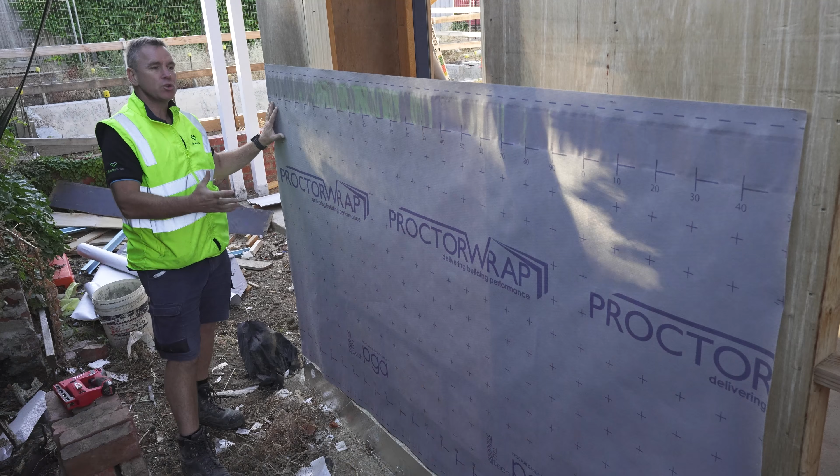Today, we're showing you the conventional way of wrapping a house externally using the ProctorWrap as our air barrier against a more cost-effective, better method which helps with time, money, and will actually give you longevity in the product.

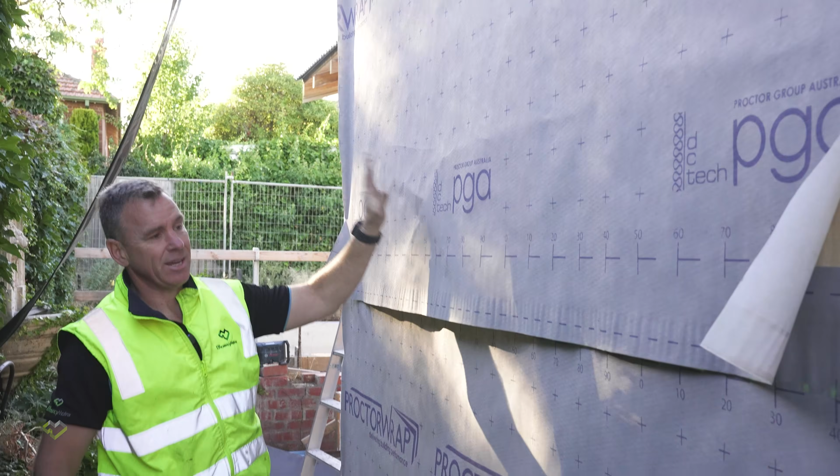Okay, now we've actually wrapped the top section, making sure that we're using the integrated tape. This will enable us to rip off these cellophane protections on the glue-loaded barrier to actually use the integrated glue as we go. Pulling this out and applying. So in this section here, I've got a substrate. It's a fairly easy process.

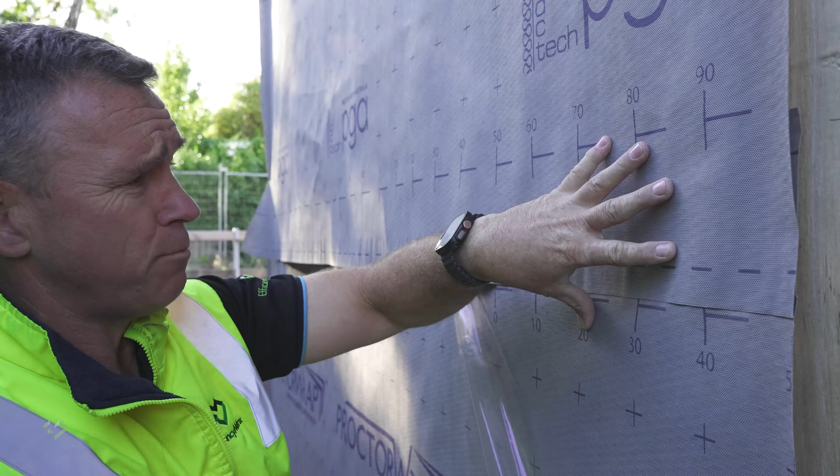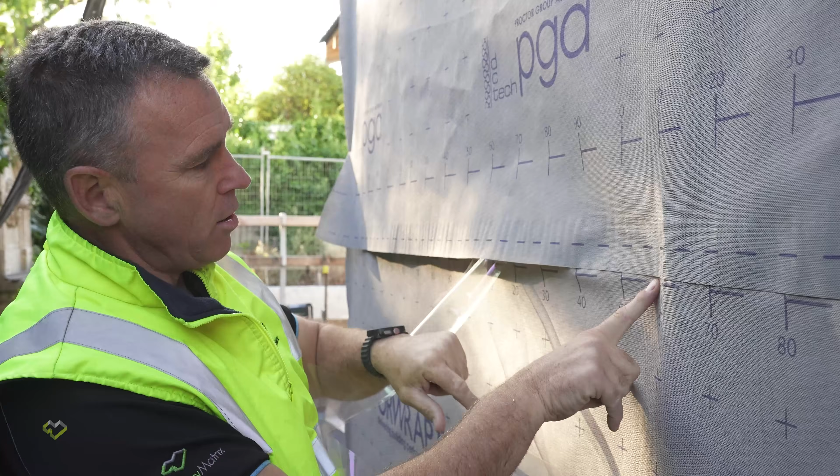But I come to a window and now I'm actually going to have a section that I don't have backing. So already I'm starting to shadow and I'm creating issues. Once again, I'm shadowing. And I've actually got areas where it's not bonding and I could rub it, but I'm not going to be able to pick that back up. That happens in between stud work as well.

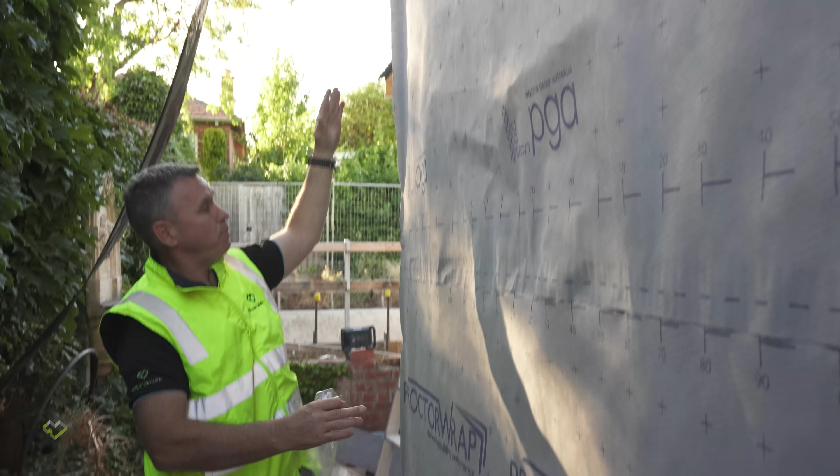I've got a couple of issues doing it this way. You need to make sure that it's completely lined up when you're applying it. And you can actually have a look, trying to wrap the bottom section and the top section without wind is complex in itself. But with wind, it's such a task that it causes the process to step out and you're going to end up with multiple issues.

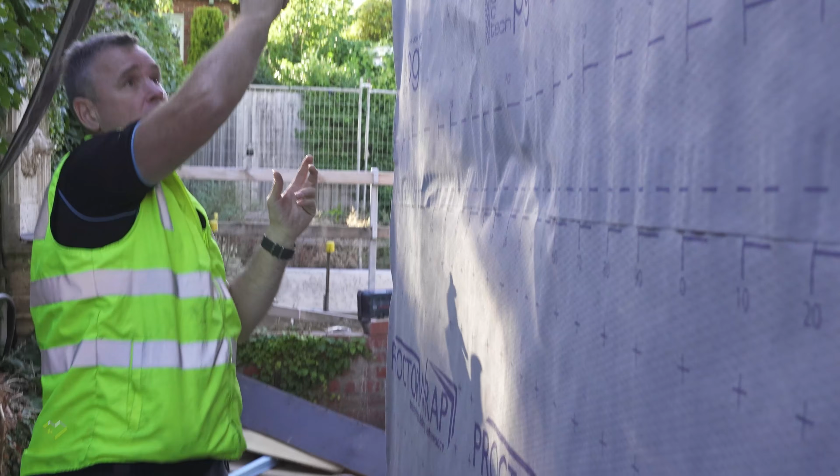I'll show you another technique very shortly where we actually will measure from length, height, make one piece up, which will enable us to fix at the top, rolling it out all the way till we get to the end, and we've pre-taped on both sides and use the integrated tape on a flat surface where we've got good backing and good adhesion. So if you have a look here, we're already starting to step out.

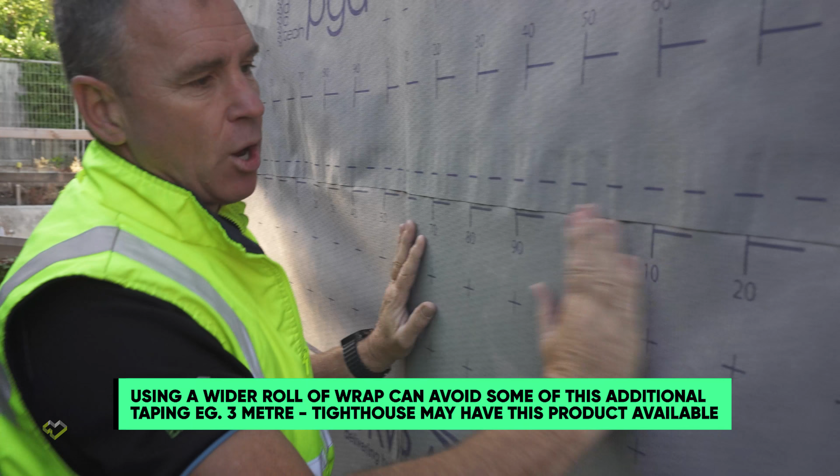Here we've got bracing behind it, so it's always going to be perfect. But if we make our way to the studs as well, and we try to make that glue bond and stick, it causes you issues. One person to do this whole wall will be a process.

Back in our factory, we were able to measure height, length, width. We've cut 3 pieces and bonded them together. This will allow us to pin the top of the air barrier and roll it out as we go, allowing gravity to help with the install process.

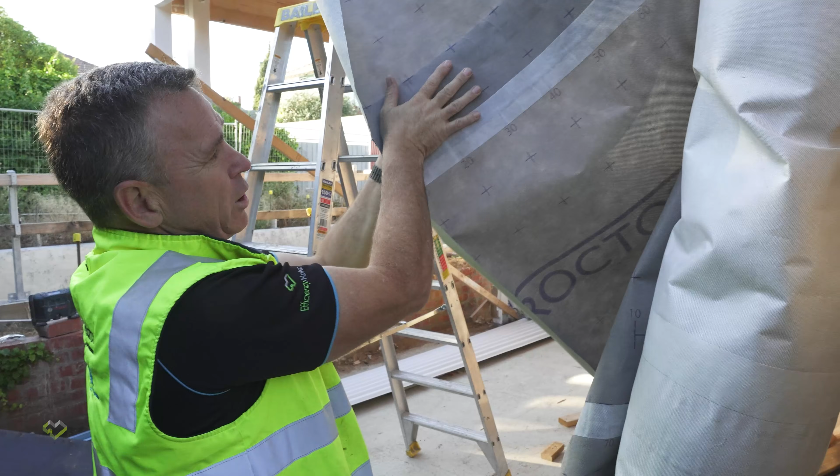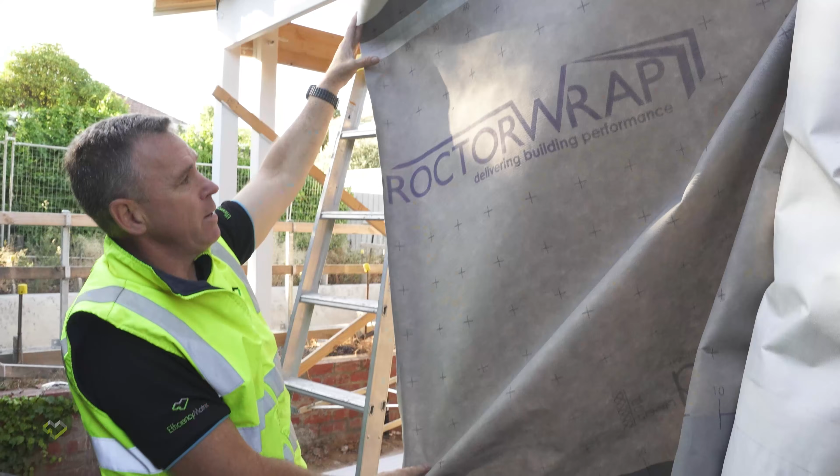And if you have a look, we've taped the back, we've taped the front, and we've used the integrated tape, and we've applied it on the ground where the surface is completely bonded. The longevity of this installation will not fail. If it hasn't been done properly, you're never going to be able to fix it again. So we'll actually show you in the next step how easy it is now to wrap this house.

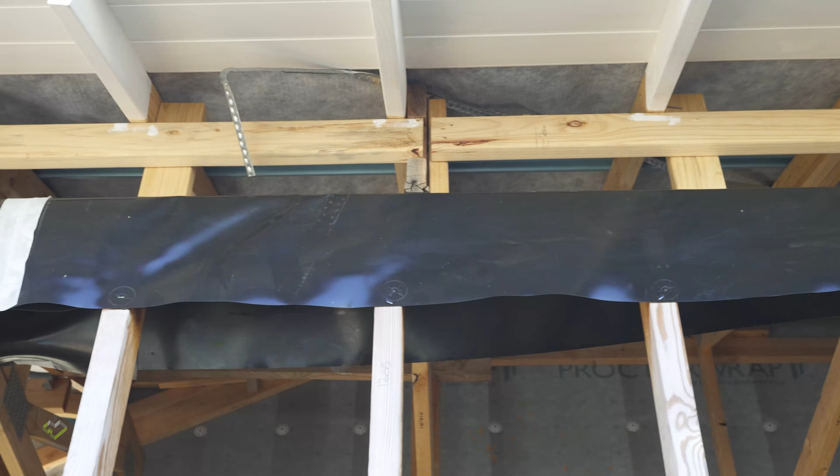At tightHOUSE, we've come up with performance solutions for using an air barrier on the outside of a house, and we've come up with this product called tightBRIDGE. We installed this on top of the stud walls prior to the trusses being installed, which will enable us to continue the air barrier inside above the roofline.

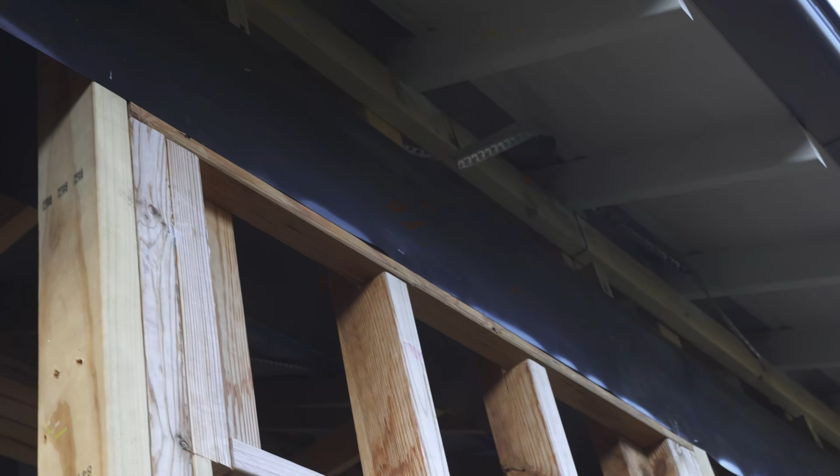This tightBRIDGE is the section that we will be taping our external air barrier to, and I've got a help down below, and we're going to show you the process of having 3 pieces of the air barrier previously taped.

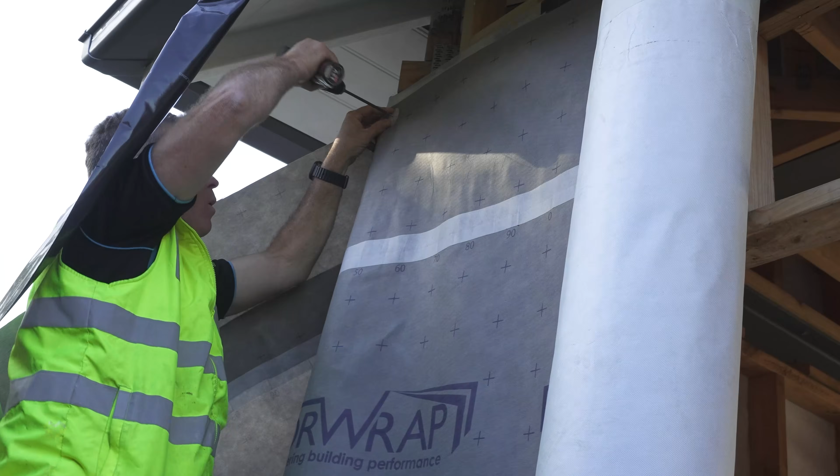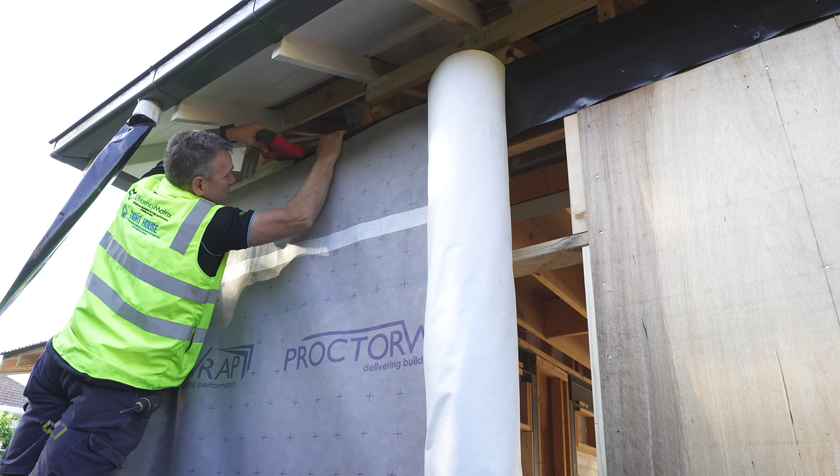I've used the batten at the top as my starting point, and I'm keeping it level on this tightBRIDGE, and I'll merely just staple. I'm letting gravity work through. I'm not needing, with wind, to fight against the elements to actually get good adhesion across all of my joints. And I'll merely just follow George all the way down and fix the top.

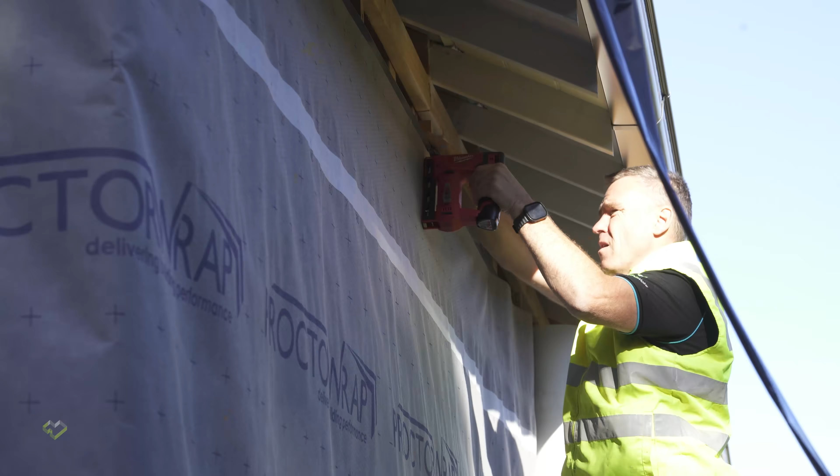Okay, so very quickly, I've been able to roll this out with the help of someone else. I don't need to try and go against the elements because you can just start to see now I'm starting to get a little bit of wind in behind it.

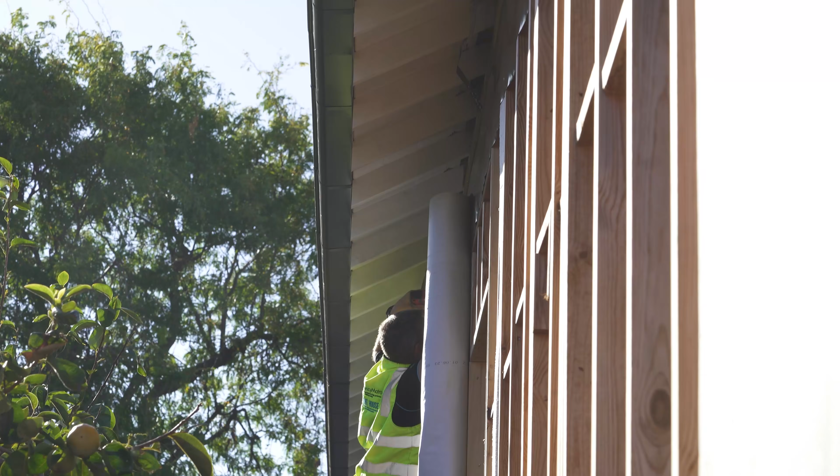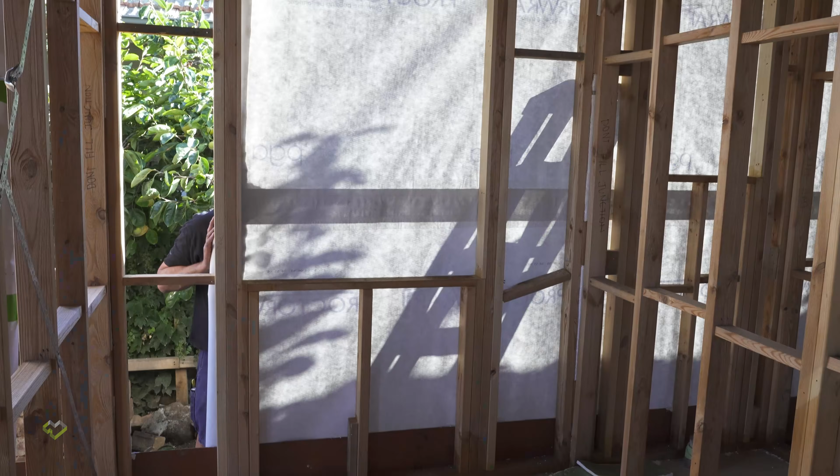Imagine trying to align the integrated tape in midair, and not only that, doing one or two joins. This way, it's 100% installed properly, and all we literally need to do is keep rolling it out and allowing gravity to help with this install. This is a far better method. Time is money, and not just that, you're going to ensure that when you've applied the tape, the integrated tape, it is 100% uniform, and you've got a perfect seal on this air barrier.

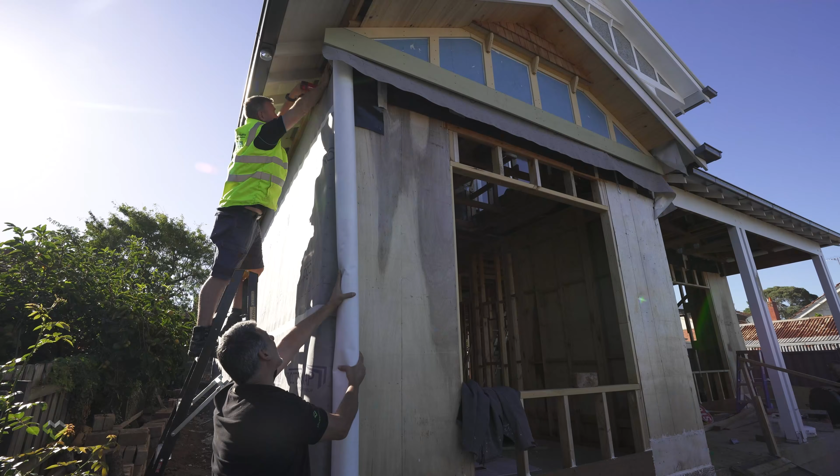Okay, in under half an hour, we've been able to cover this whole side. We've actually returned it around the front, then stepped back in and got to the doorway. And this was all accomplished with two guys installed in under half an hour. Now we've got gravity to work with. We're going to start at the top and work our way down, pinning this all the way down.

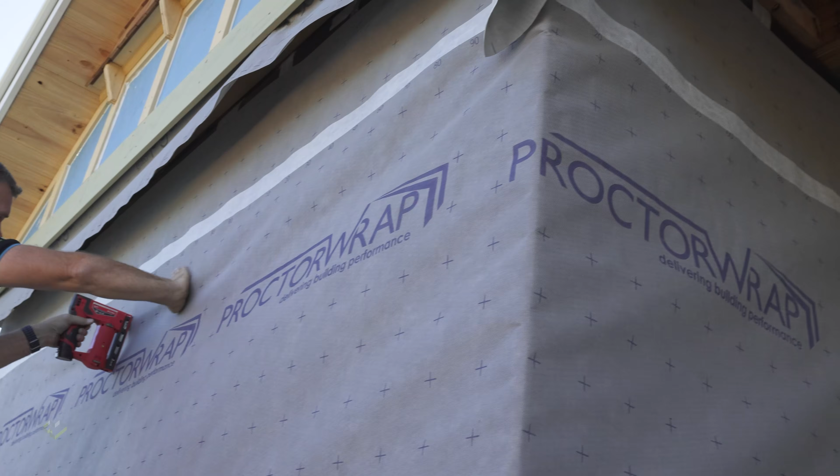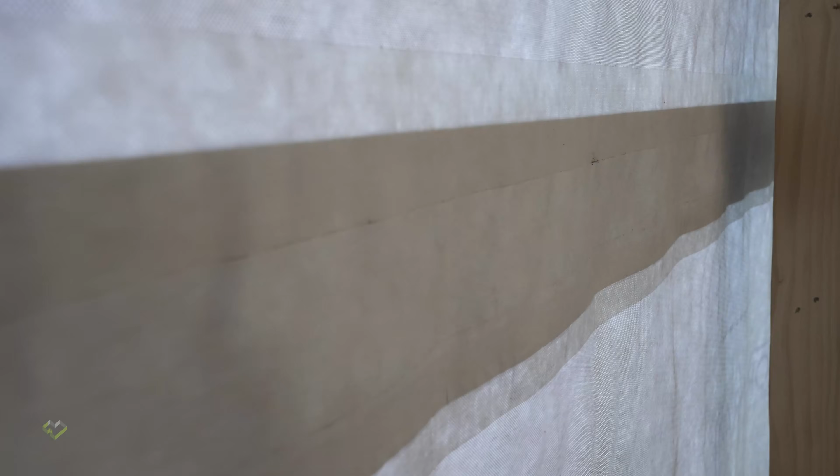We're actually going to fix this with staples, and where every noggin is, we'll be able to install buttons, purely because they're going to batten this wall, and this is going to have a Hebel finish, so we don't want to impact any of the surfaces that the carpenter needs to install to. But time, money, effort is the way to install this product. Pre-make it, guys, and install it in one hit.

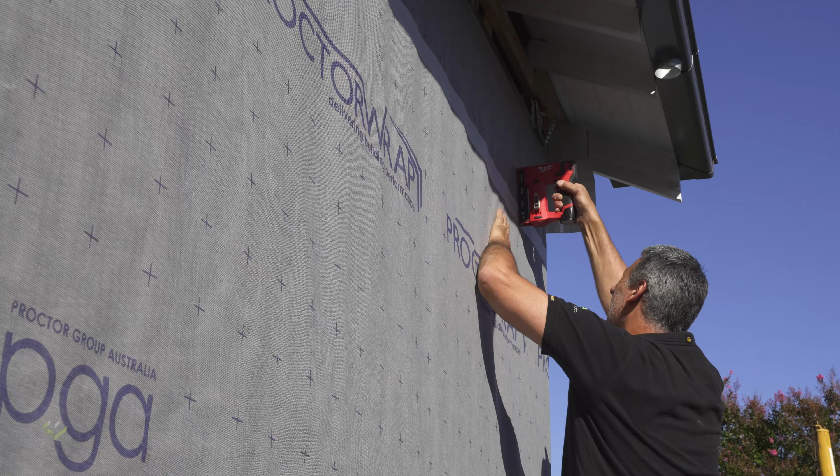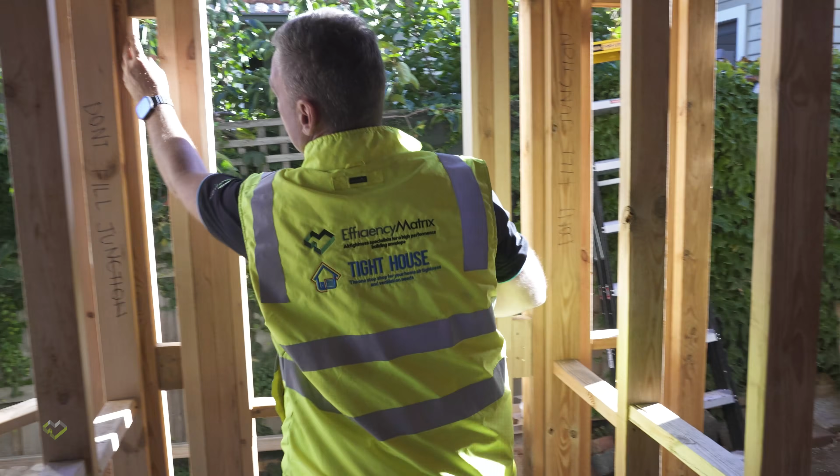I'd just like to talk about an internal wall that comes off an external. Now, when we insulate the external wall, the insulators have got all these areas in between the studs to be able to fill in. But when it comes to an internal wall, the way that the frame is done, these sections behind internal wall junctions to the external walls always get missed. So we'd like to show you a technique of what we've actually done prior to the wall air barrier cladding on the outside, how we've actually insulated that.

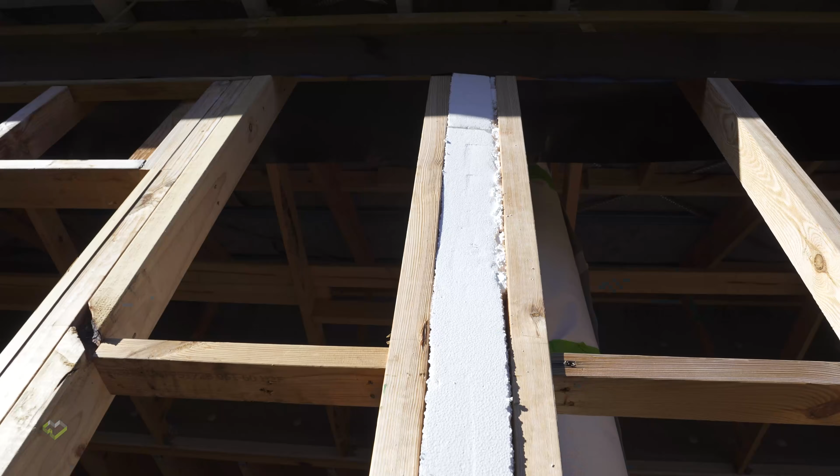This is the outside section that always gets missed, and what we've actually done is filled this up with some foam. So we've got a good insulated area, because these areas will always be insulated from the inside, but an internal wall comes off this section, and around the whole perimeter of the house, we've made sure that these areas have been insulated prior to us doing the air barrier on the outside and the weatherboards.

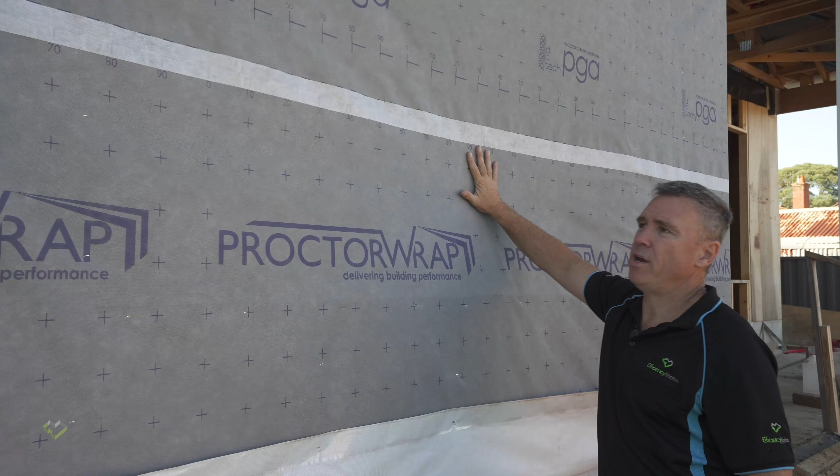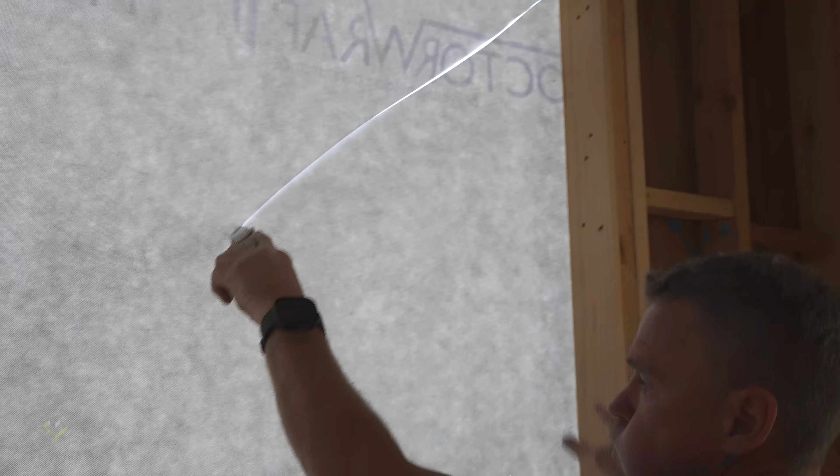Okay, now we've got a window here. We haven't cut it out yet, but we're going to show you an economy version of Proctor's window detail, where we use a dry flash, we use U-Butte, which is a butyl tape. The reason why we're going to go with the economy solution here is because this is a direct cladded, no veneer building, and once the windows are installed, the plumber or builder will install a flashing over the top of that window. So that's our weatherproof seal. So we're really just concentrating on an airtight building solution. We'll start that process and go inside, and we'll cut this out.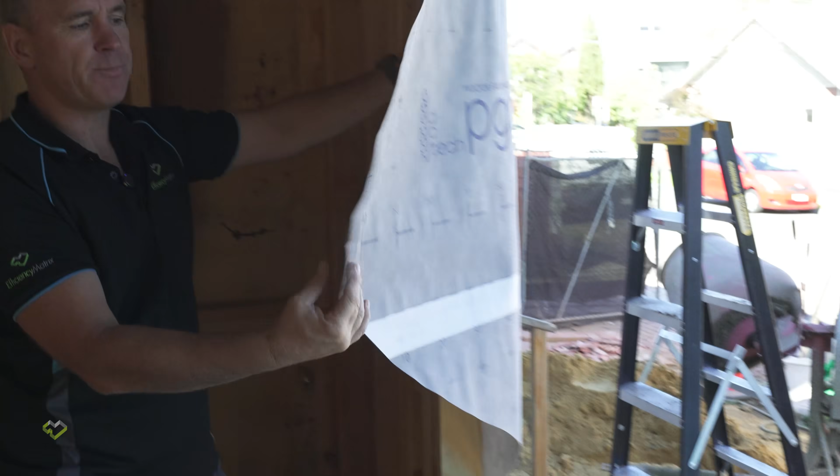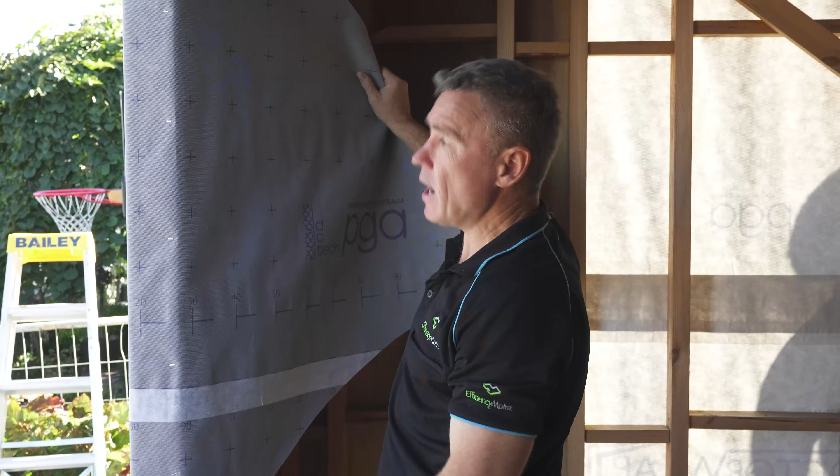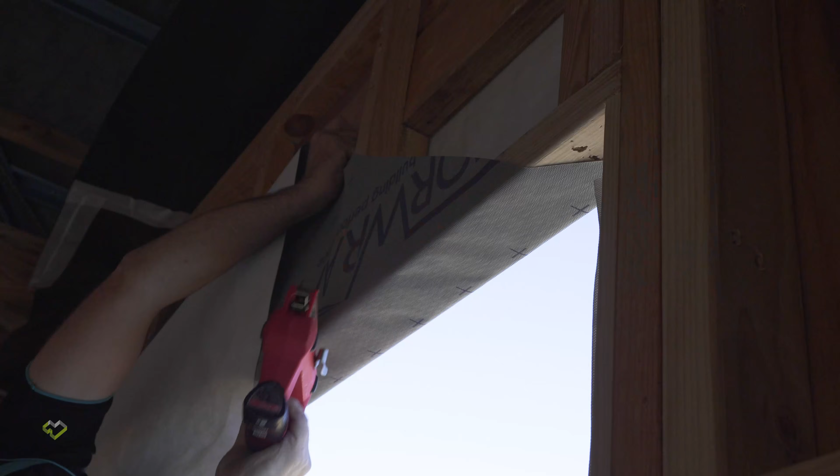Okay, now we've cut this window corner to corner, and that will allow us the next process, and we'll pull the bottom and the sides, and we'll end up fixing them, which is the first step. Now I've stapled the sides and the bottom, and all I need to do is just trim off the excess. Now previously, in Proctor's window detail, we would leave this step to the last. But with the economy way that we're going to finish this window detail, we can go ahead and fix that detail straight away and trim off the top as well.

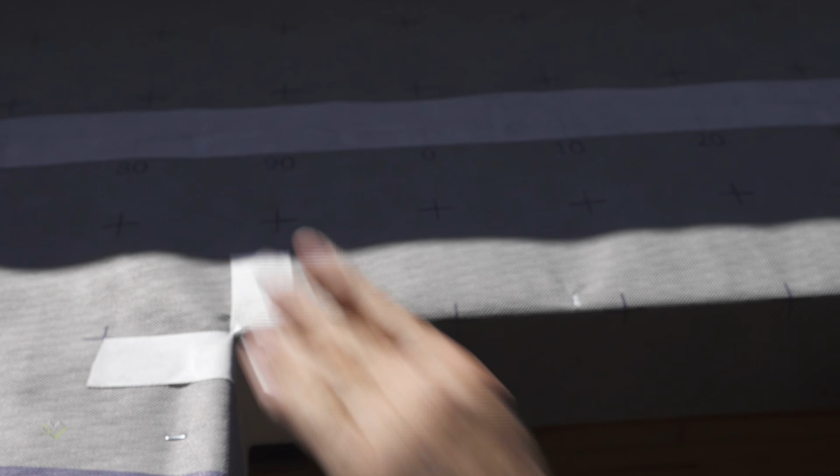Okay, now we've completed all the steps. We've cut to the center, we've pulled the flaps in, and we've fixed it on all sides. Next step, we've got a gap here in the wrap. So I'm going to use a Proctor High-Tack Plus, and I'm just going to actually seal the wrap at the top to make sure that it's completely sealed. And I'm just making sure that I'm getting a good seal. Okay, now that completes the sealing process at the top, and I'll continue that on the other side.

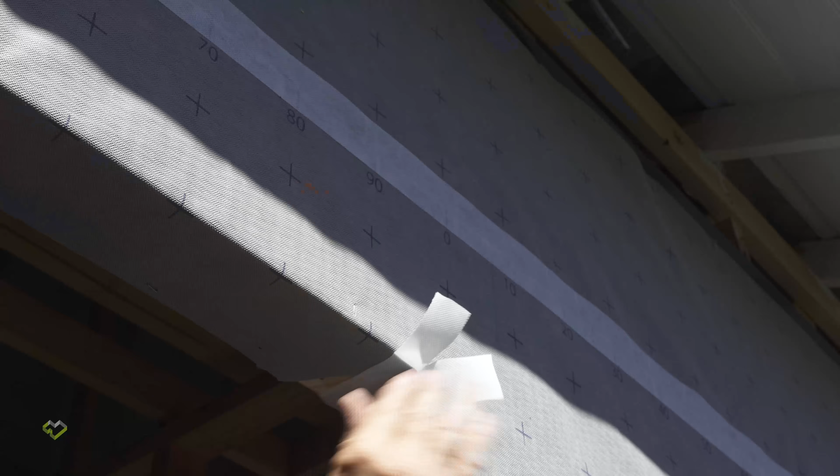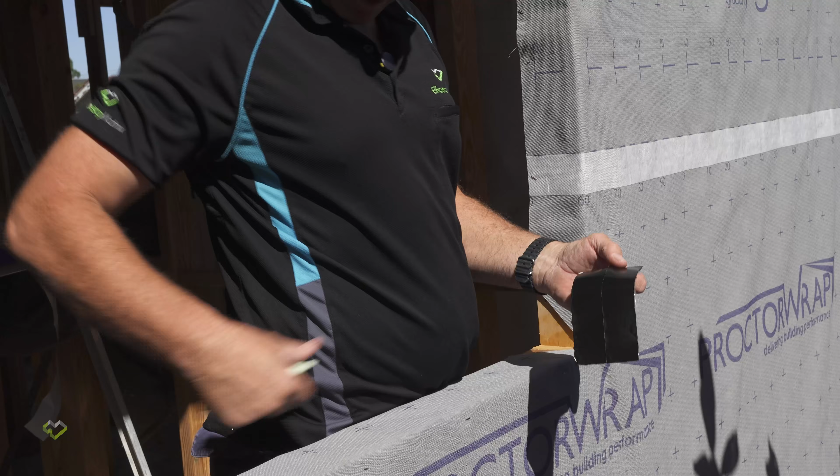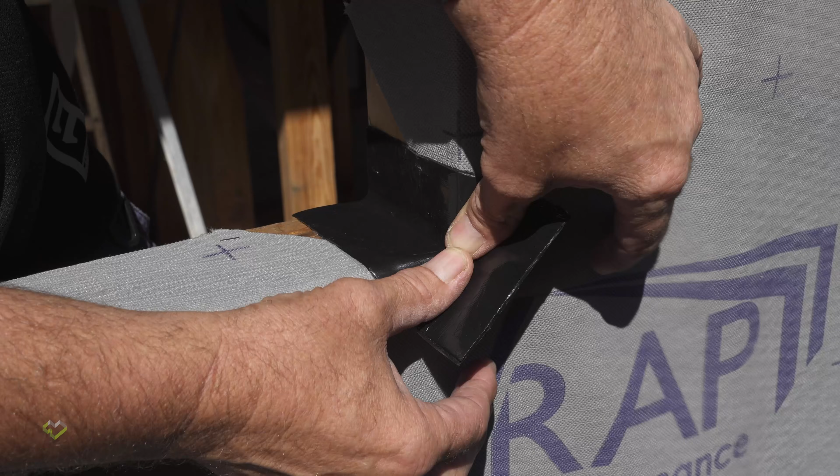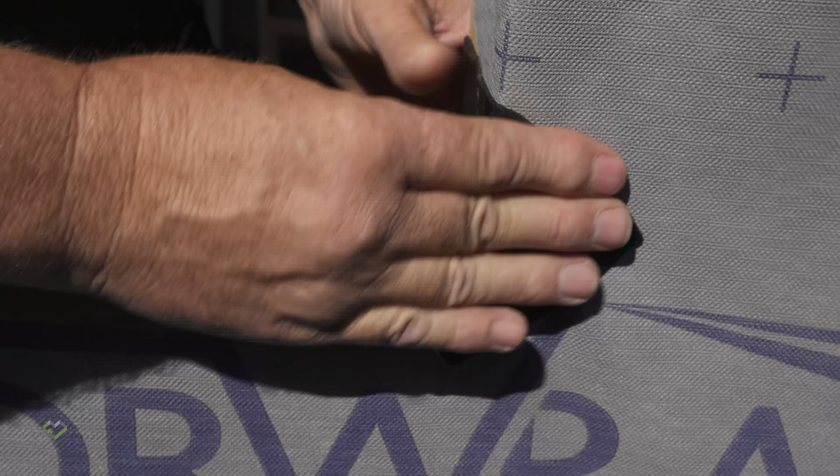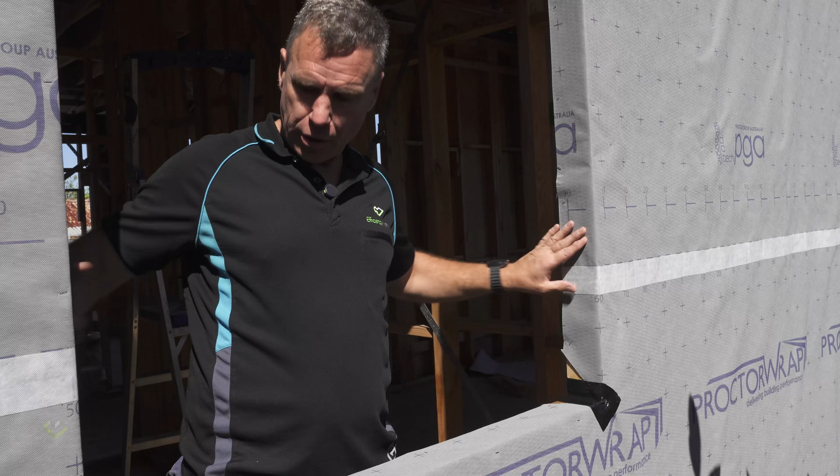This detail is completely different to the Proctor passive window detail, but due to the way that the windows are being installed, this is quite adequate for how we need to seal up these windows. I'm going to start off installing this dry flash up 250 mil. I've previously marked it, just trying to keep it square and flush to the back of the stud.

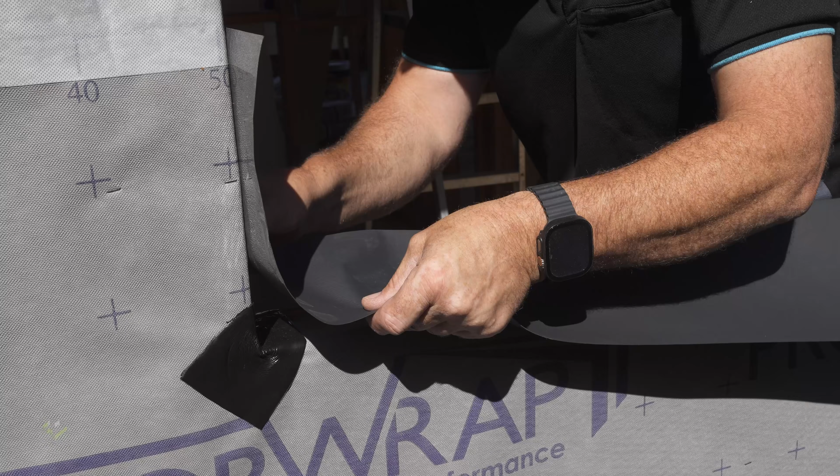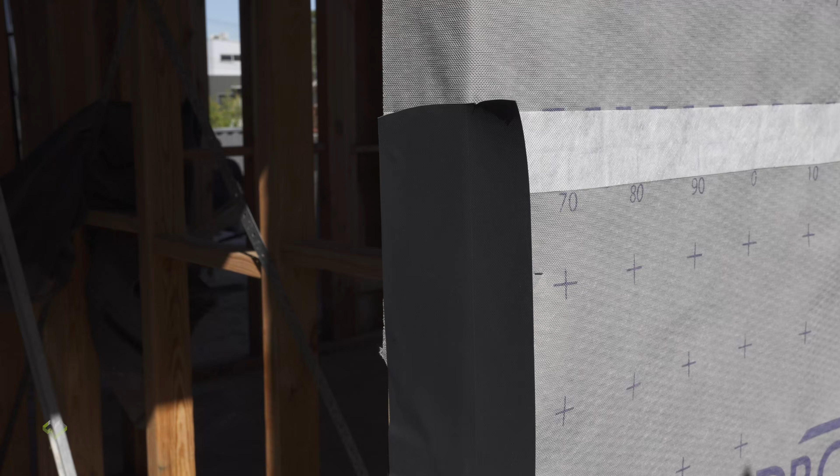And when I get to the corner, I want to make sure that I'm not missing it and I'm at a true 90 degrees. Applying with a bit of pressure as I work it around. Making sure I'm nice and tight in the corner, and just work that glue and make sure you get a good bond to your air barrier. And usually I would use an applicator to make sure that I'm helping with that bond process.

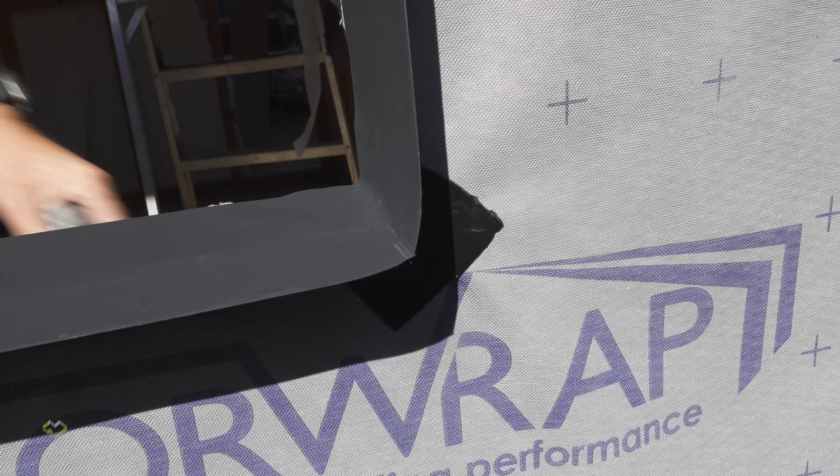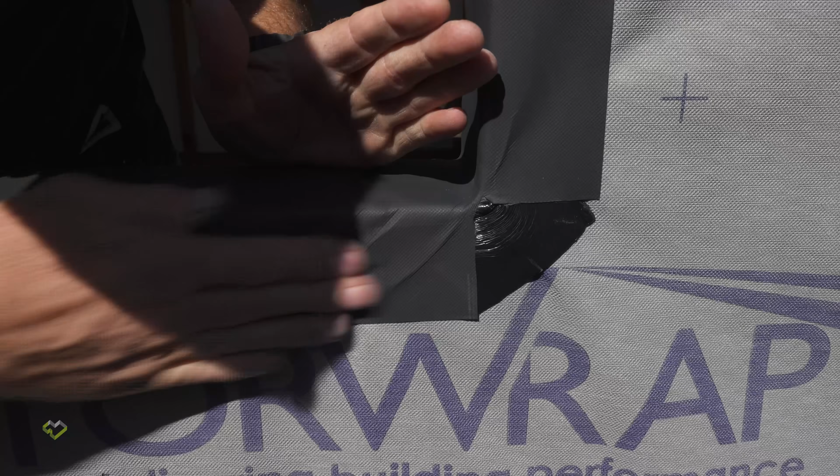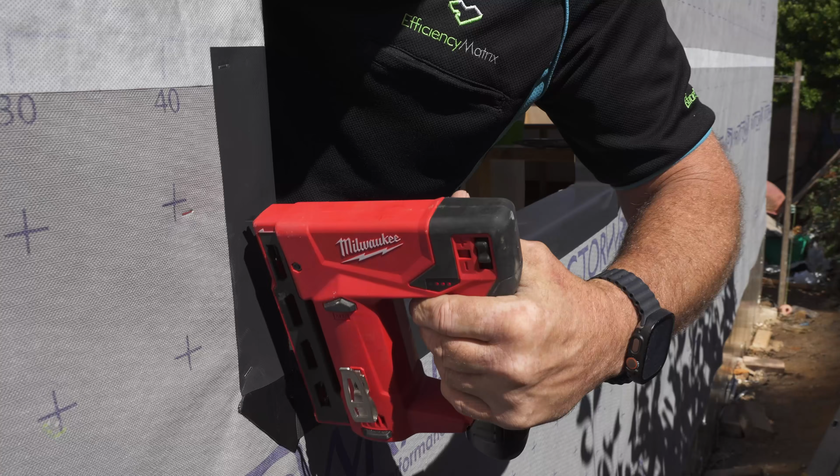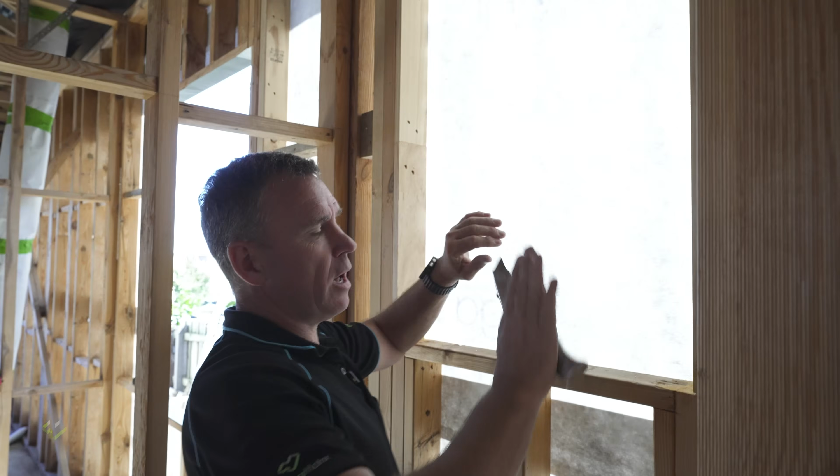Okay, so now here's another window. I've got doors. I've got more windows further down. I'm just going to go and cut all the windows, pull them all in, and doors, and staple all sides for the next process.

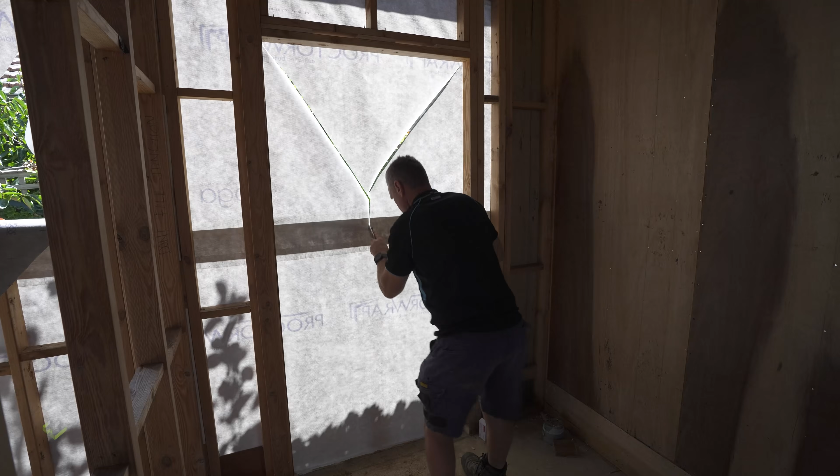Okay guys, just a quick note. As we said previously, multiple times, we've used the integrated tape. We've taped the outside and we've taped the inside or the back of the air barrier. We've installed it. Now, it might be some time before the builder actually gets to close this in.

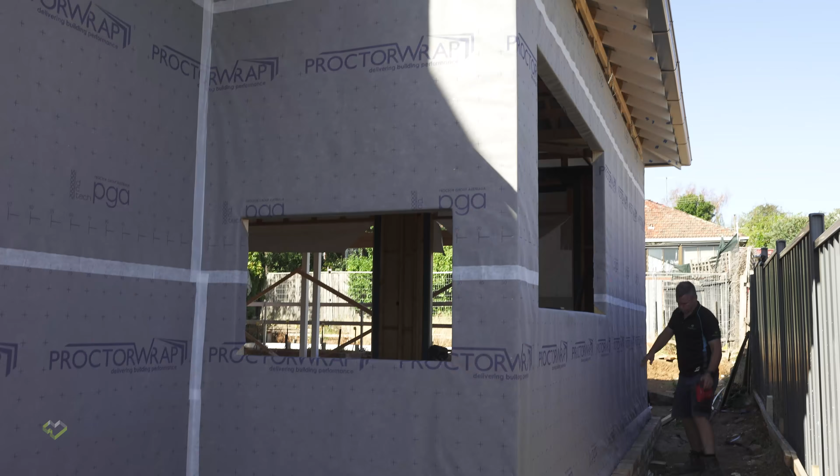By taping it on both sides, we are making sure, depending on which direction the wind is, it's going to ensure that it's sealed, it's not going to give way, and we're going to have longevity on those joins many, many years after the outside and the inside's cladded, and we could guarantee that this is not going to fail with this system.

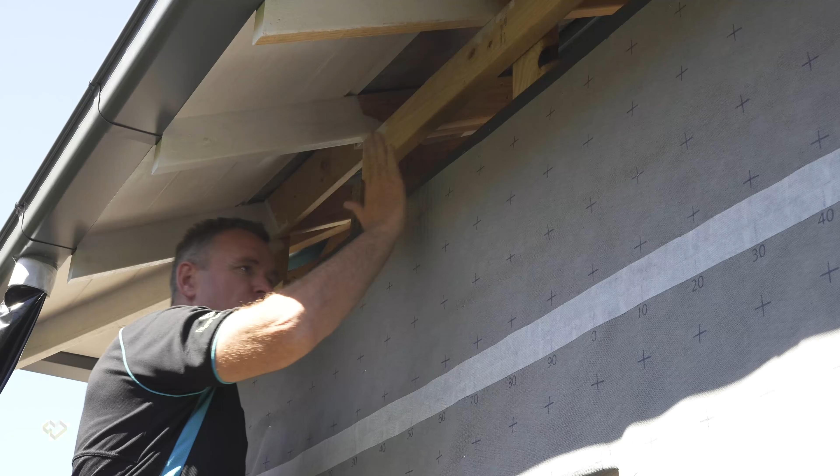Okay, now we've wrapped the outside. We've got our tightBRIDGE at the top. Now what we need to do is we need to connect our air barrier to our tightBRIDGE. So once again, we're going to use a Hi-Tac Plus tape, 75 mil, because we want a good purchase. And we are merely going to tape the Hi-Tac Plus to the Proctor CW and the tightBRIDGE.

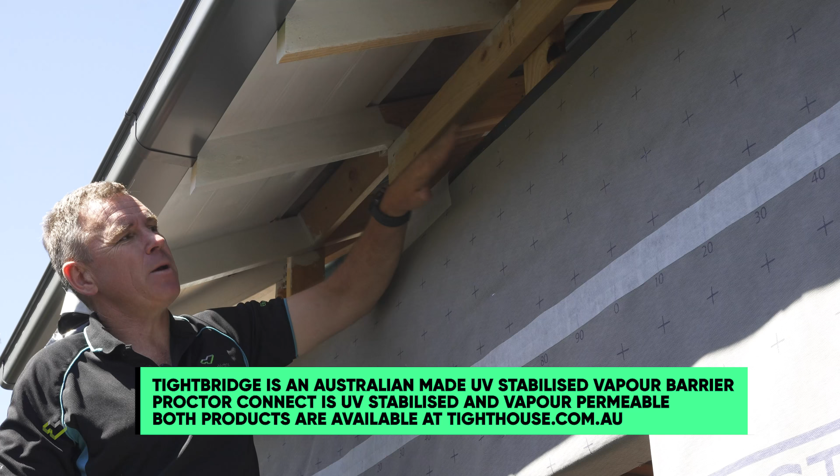The tightBRIDGE is a product sold from tightHOUSE, but Proctor actually have a product called Proctor Connect, which is vapour permeable. This is an impermeable product, which we've decided to use in this circumstance.

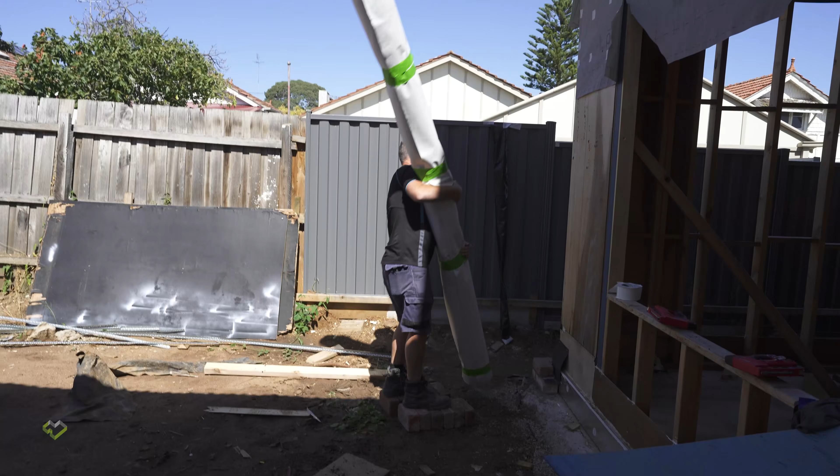We've got the other side to go now. Once again, we've measured, we've taped it all up, we're ready to roll it out. Very quickly, we'll get the other side done as well. We're lucky we had a factory, but you don't need a factory. You can have a car park, you can have a piece of road, you can even get a broom out and sweep up inside the job site to make sure that you do this. But trust me guys, it's the way to do it.

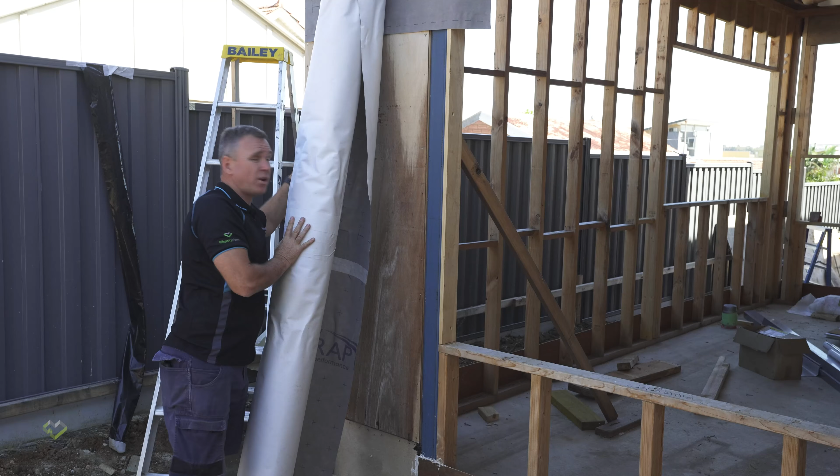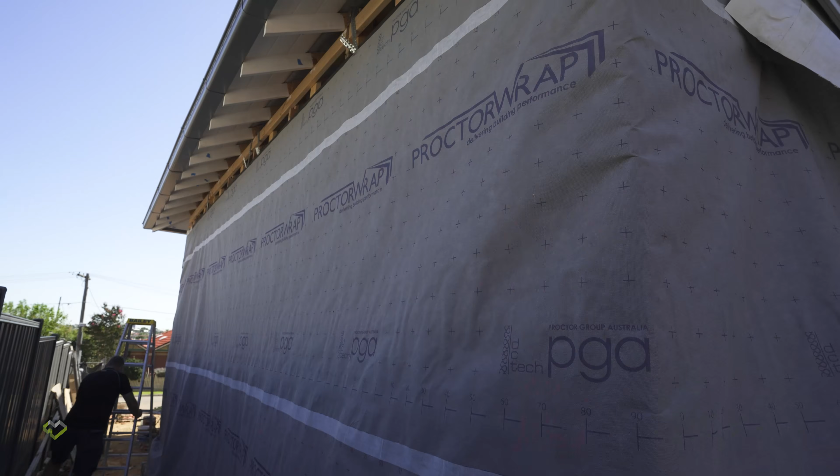We've got 25 meters, and within, I'd say 25 minutes to half an hour, we've got this installed, and then we're basically just going to peg it all the way down, cut the doorways, cut the windows, job's done. We've got a little bit of breeze at the moment. If we tried to wrap that piece by piece, we're never gonna get those seams together.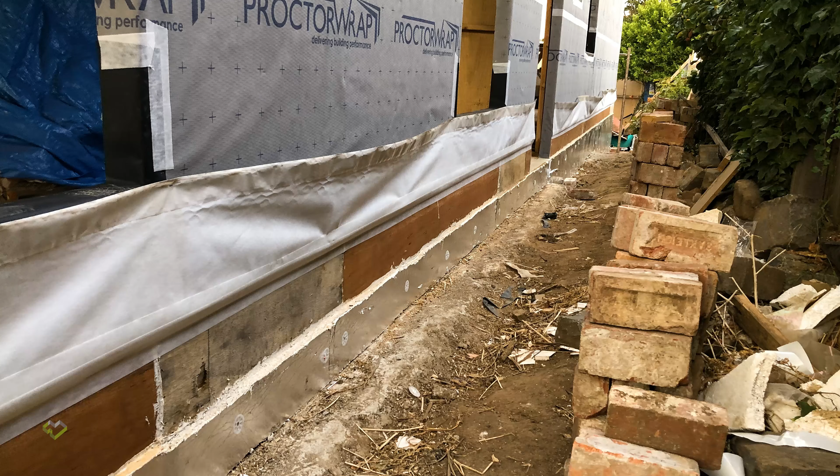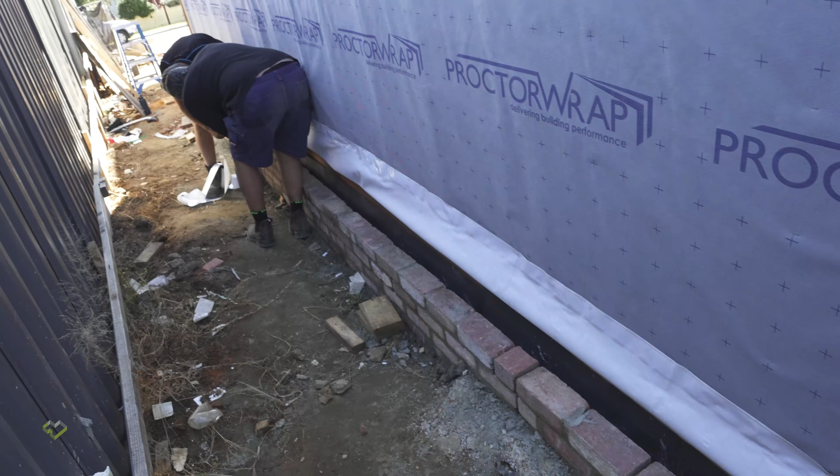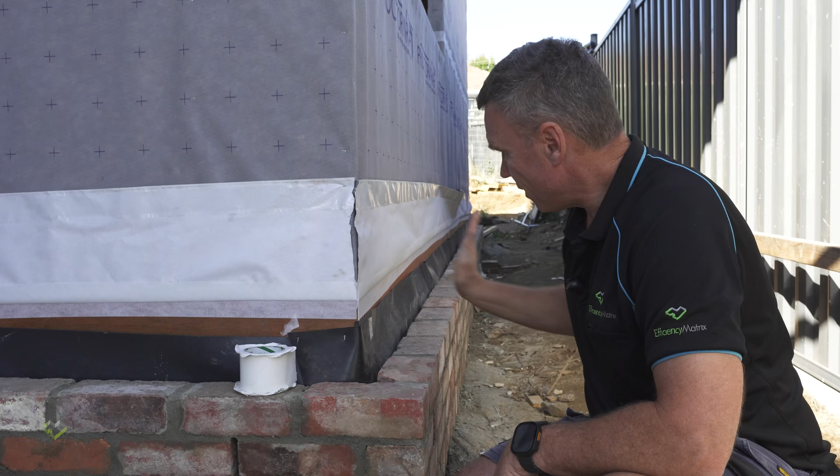We are actually going to tape the air barrier to the bracing, which will give us our air barrier seal. And we'll complete this all the way around the perimeter of the whole building. And now you can clearly see we've continuously sealed the air barrier to the bracing. We've just got external and internal corners to worry about.

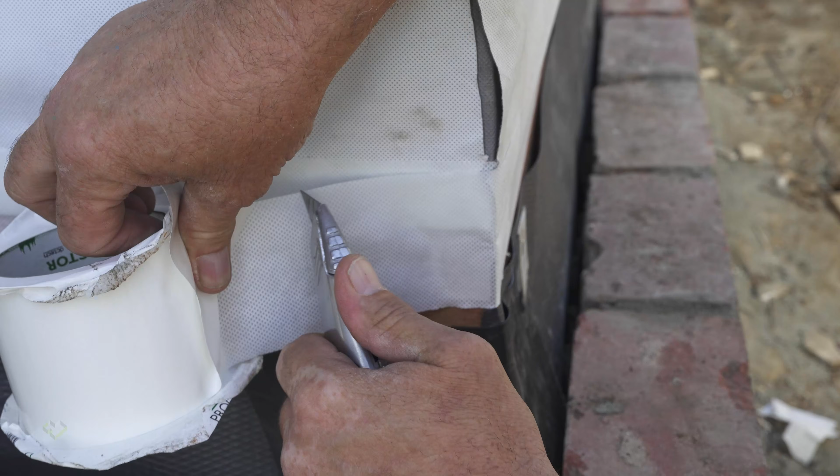Now this line right here where we've taped, it's open. So at this point we just need to make sure that this is continuous before we pull over the air barrier to continue the next step. Okay, so I've actually taped that corner and now it's going to allow me to just roll this corner over, and you can see underneath that the tape is continuous.

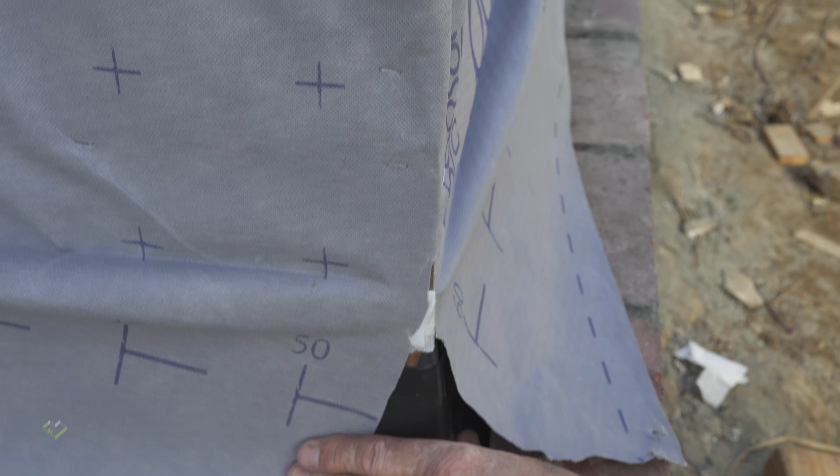And we've just got this little gap right here. We'll unpin the air barrier all the way down, and then the next step is to slide this in behind the brickwork over the face of the damp course.

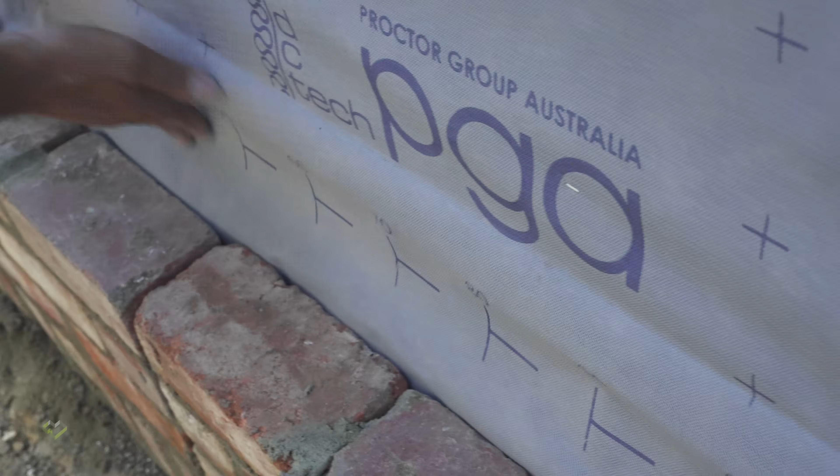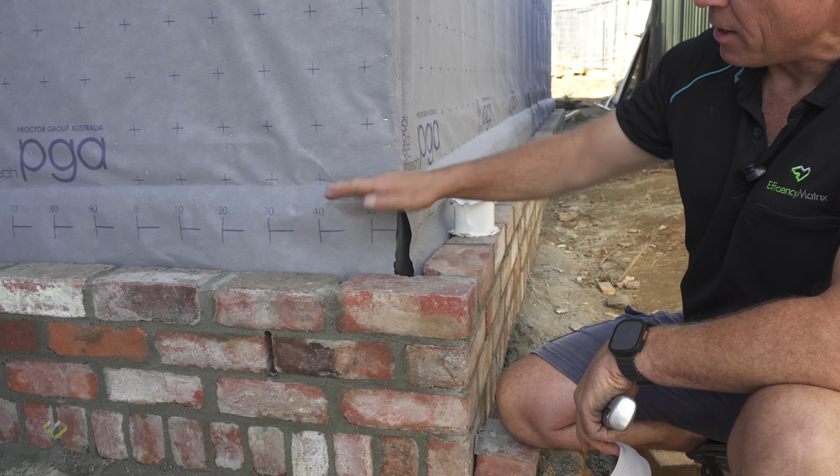Okay, we've unpinned it and we've flipped it over, and we've just tucked the air barrier in and on top of the damp course, which the bricklayers have installed on this course, and they've run it up and tacked it onto the bracing. Being mindful that we've actually sealed it here to the bracing and to the back of the actual air barrier itself. And now by tucking that in, we just need to neaten up this corner, and you can see how it's continuous here because we installed that small section. So we'll just tape this up, we'll bring it back together, and then that will seal off this corner nicely.

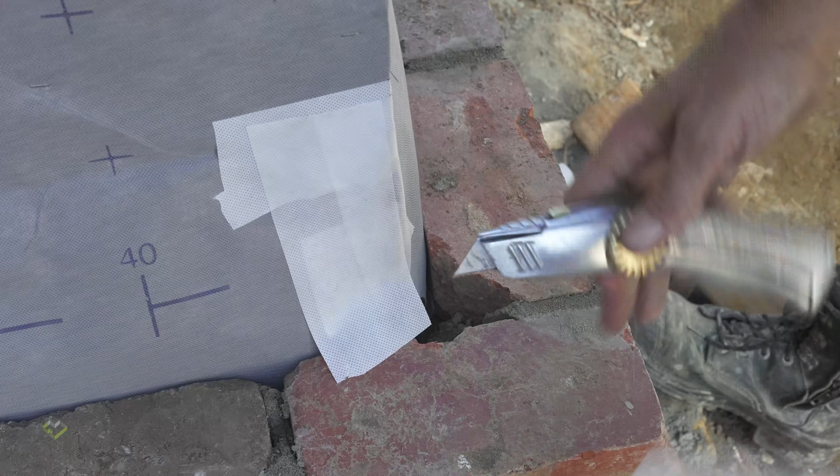Okay, now we've finished this process and we've sealed this corner nicely. And if you have a look, you can actually see where we've taped onto the bracing and also onto the wrap that we've folded over. So now, essentially, we've got the tape like this, onto the bracing and then onto the back of the air barrier. So just to make sure that this stays in place and under seal, I'm going to staple this detail across the whole brace.

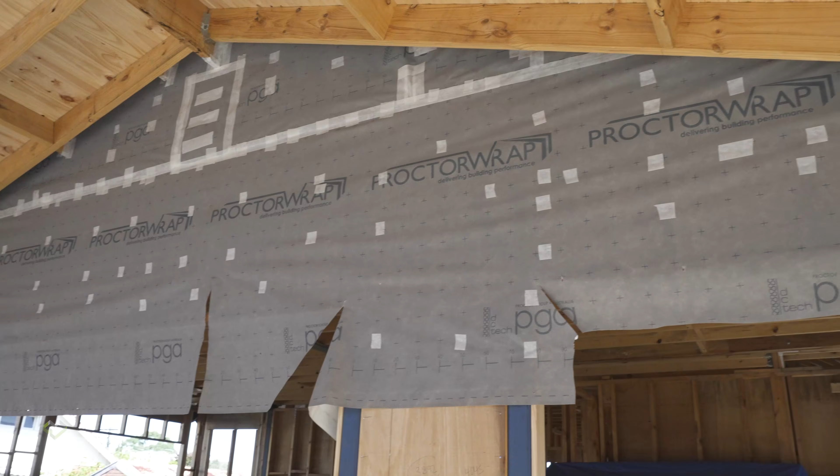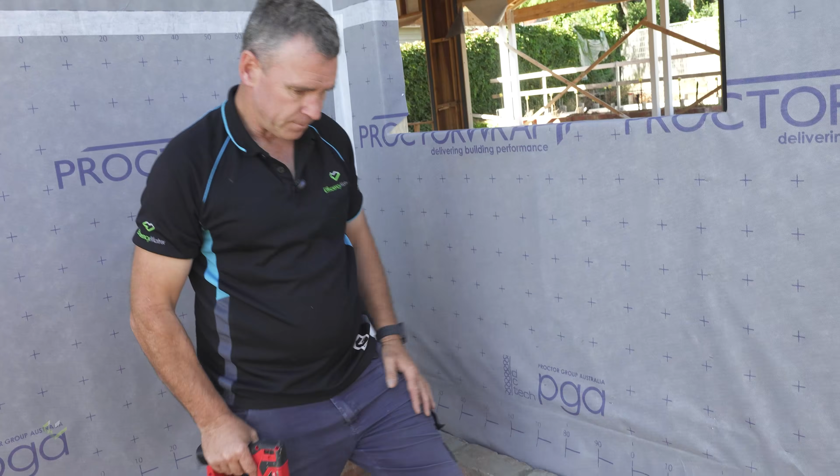And this is going to help with compression on that seal, and we'll just cut a small couple of pieces of strips over the top of it, which we will for every staple, and that will help with longevity. And it'll allow any moisture to run down here onto the damp course the bricklayers have installed and out any weep holes throughout the perimeter. Job done. So we've finished the detail on the outside.

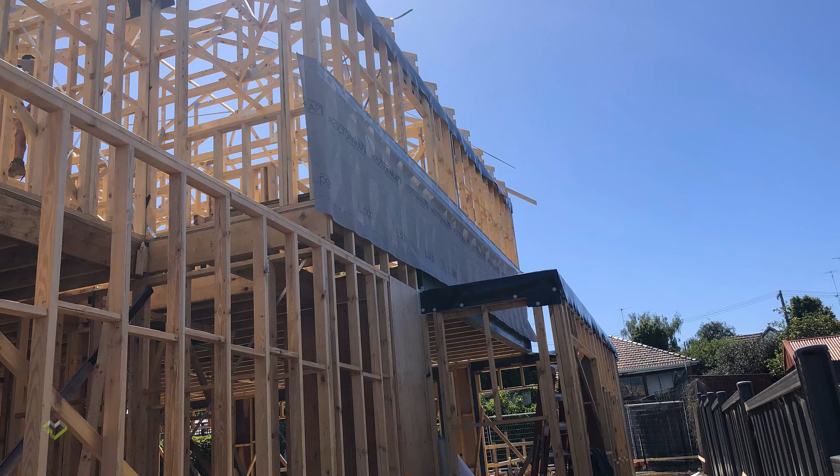You can see up through here, this is the wrap that we wrapped the upstairs with. There was a process and a sequence for us and the builder to understand how and where we were going to make our air barrier line. So prior to any of the roofing structures being installed, for this small section of roofing downstairs, we installed the wrap and asked the builder to hold off on these trusses so that we were able to get the wrap all the way down.

Because these sections of a wall in a ceiling for a first floor always get forgotten about. We've actually wrapped it now. When the insulation gets installed, hot air is not going to get into that wall and the insulation is going to perform so much better.

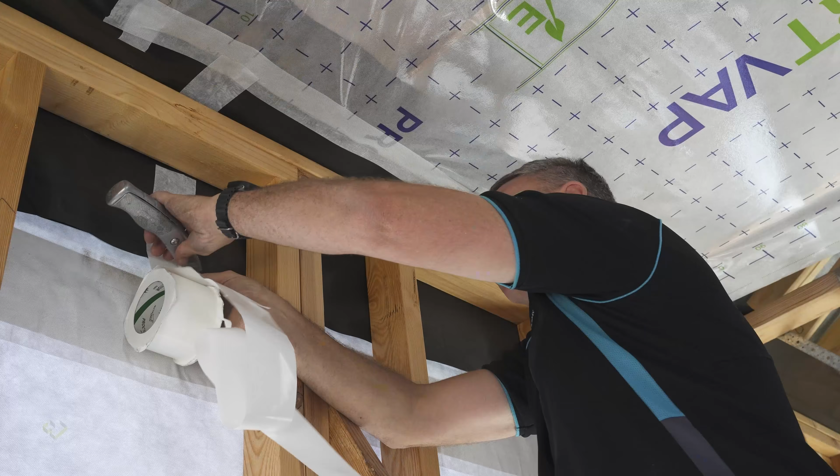And then if you have a look here, we've used this timber and this tape to transition from upstairs air barrier to an internal air barrier that we are actually running across this small section of roofing, which will enable us to come all the way across, and then we've installed it to our previously installed tightBRIDGE, and all these details are on tightHOUSE. And if you have a look here, this smart wrap is continuous from the external wrap from upstairs. It comes to an internal Proctor Smart VAP internal, and then it connects to our tightBRIDGE and then to our external CW again, completing our air barrier line.

And then the builder is actually going to install a suspended ceiling, which will enable all the services to be run through a false ceiling and will not penetrate this air barrier. And please note, we've just installed this as a sample because insulation will obviously be installed prior to this internal wrap. So guys, have a think about it, speak to your builder, let them understand exactly what you're trying to achieve and the process that it needs to be achieved by.

We're just about at the tail of it now. And if there's anything that you want to take out of this from wrapping a house, it's that we did most of the hard work on the ground and we actually made it the easiest. Just look at how good this install is. It was very quick. At parts of the day we did have wind.

If you're trying to tape it in midair with no substrate behind you, trying to get these integrated tapes and these tapes 100% true and straight, you're gonna struggle. This is time, this is money, and this is effort. And just look at the quality, guys. So if there's anything I'd take from this, try and do the hard work on the ground.